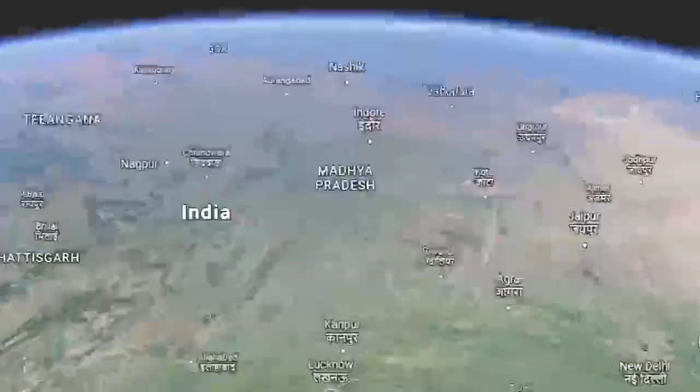Since 2010, Madhya Pradesh has embarked on an irrigation expansion and modernization plan. These efforts have been rewarded by record annual agricultural growth of 20% over the last 3 years. The state plans to further increase the total irrigated area to 59 lakh hectares by 2025.

This will be achieved by maximizing irrigation efficiency and water productivity by implementing pressurized distribution network in 80% of all irrigated areas.

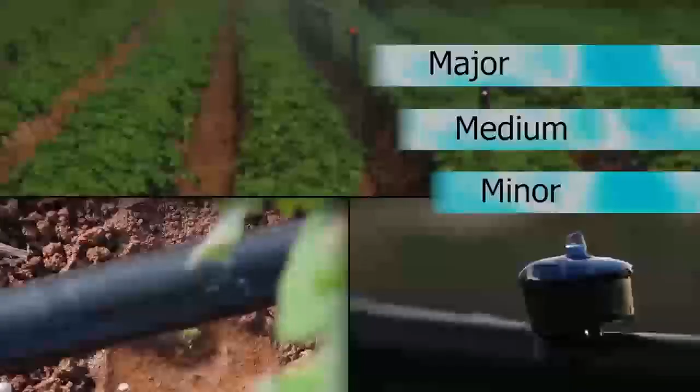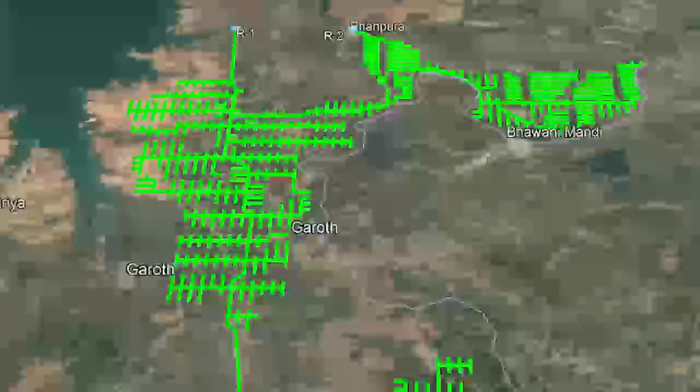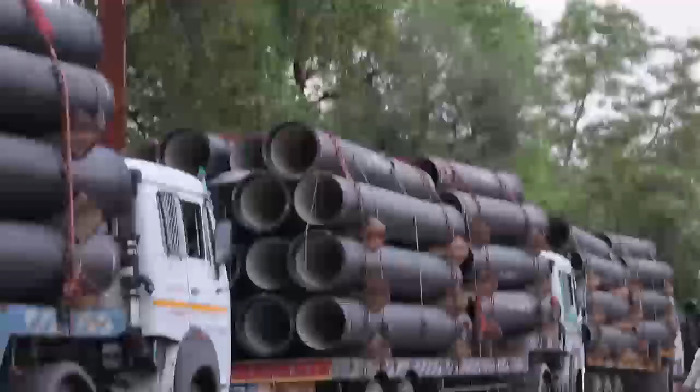The Madhya Pradesh Water Resources Department has awarded the Garoth project to Offshore Infrastructures Limited for execution. The project is located in Bhanpura Tehsil of Mandsaur district. This project is divided into two parts, Kanwali and Rewa Barrage.

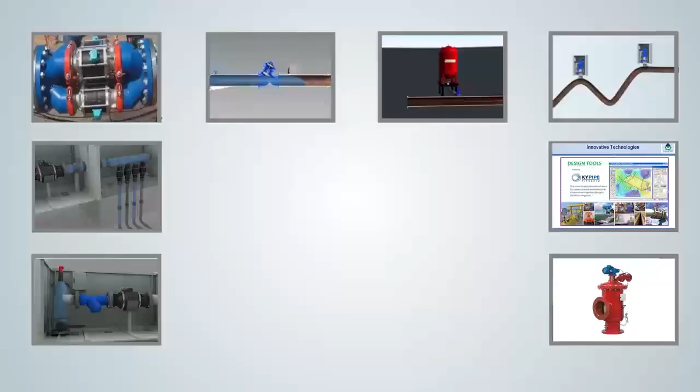Sai Sanket, a technology integrator and smart solution provider to water management projects, has been in the business since 1999. Sai Sanket is implementing smart water management solutions through innovative Israeli technologies.

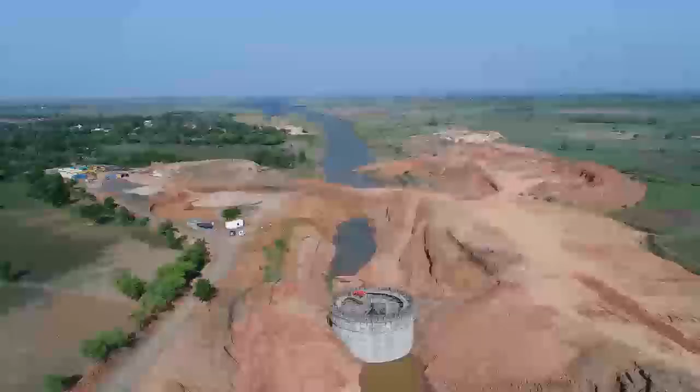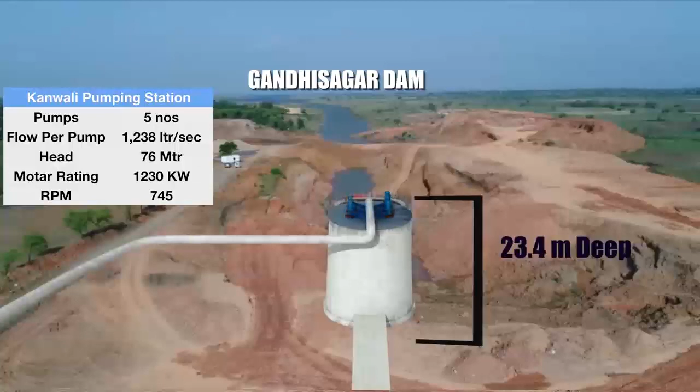The Kanwali Pumping Station. This pumping station is responsible for pumping water from the Gandhi Sagar Dam. The intake well is 19 meters in diameter and 23.4 meters deep. Using slip-form construction technology, the construction of the intake well was completed in a record time of just 1 month.

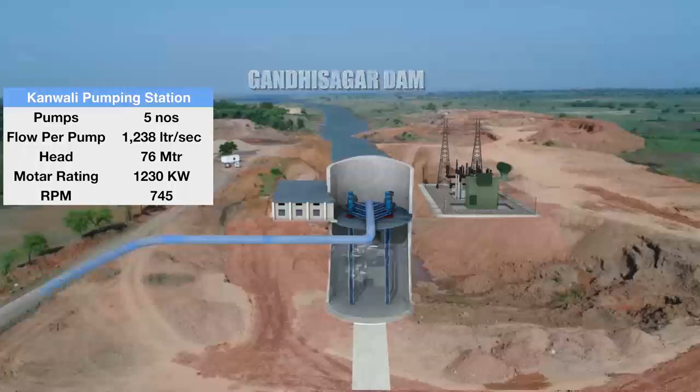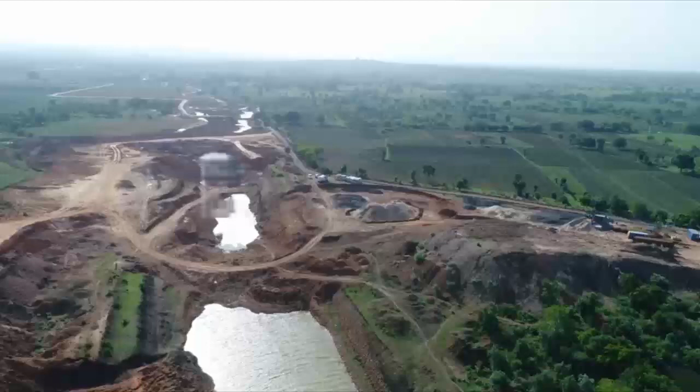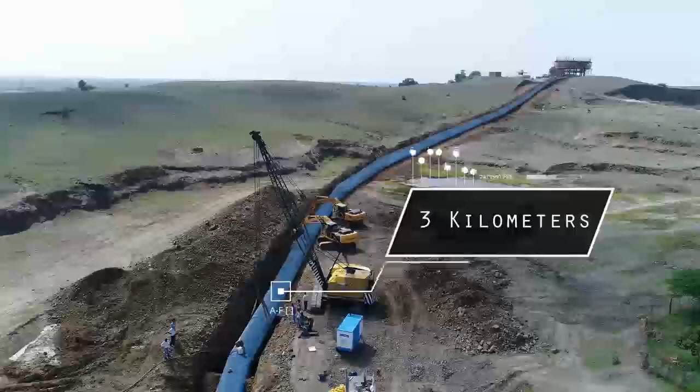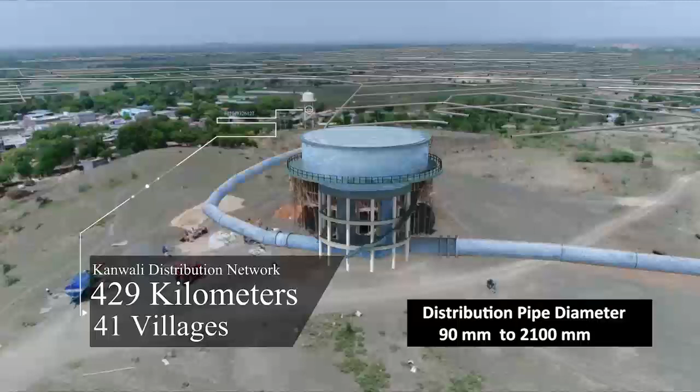There are 5 sets of vertical turbine pumps, each delivering 1,238 liters of water per second. This goes to a storage tank on a hilltop 3 kilometers away. The total pipeline length of 429 kilometers covers 41 villages within a command area of 15,000 hectares.

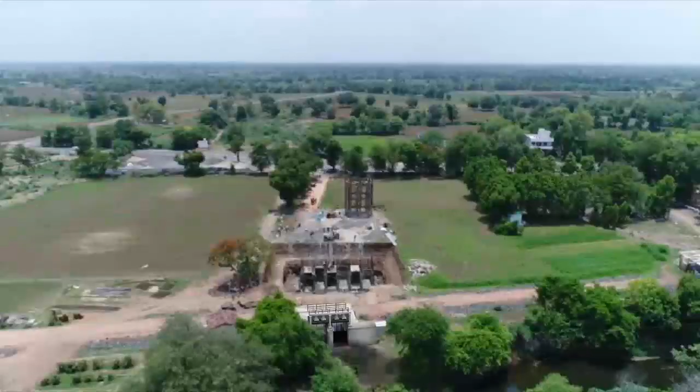The Rewa Barrage Pumping Station. This pumping station pumps water from the Rewa barrage. There are 5 sets of vertical turbine pumps, each delivering 527 liters of water per second to an overhead tank located in the vicinity.

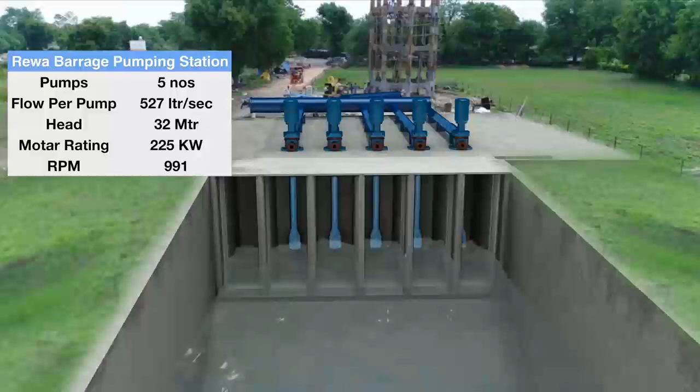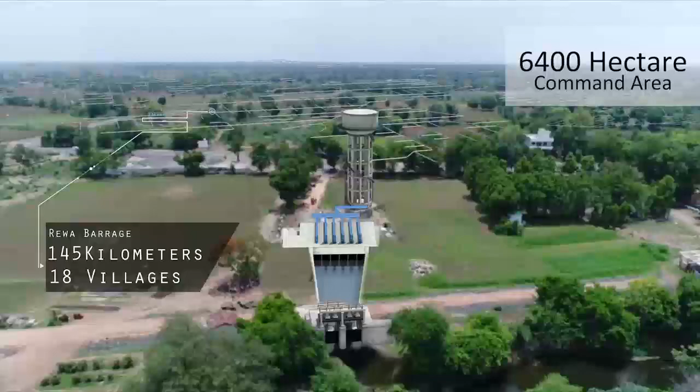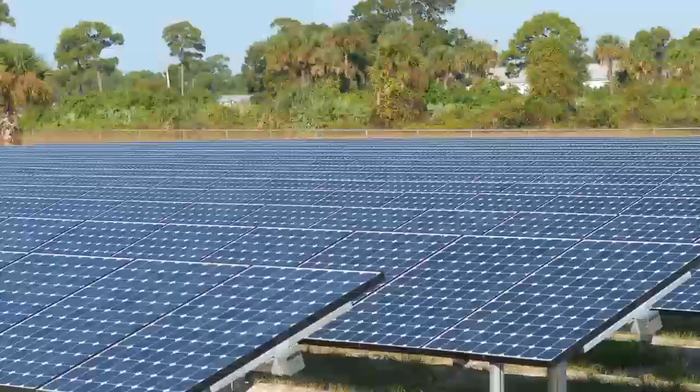The total pipeline length of 145 kilometers covers a command area of 6,400 hectares to deliver water through a pressurized distribution network. A solar power plant with a capacity of 7 megawatts is a part of this project, which will offset electricity consumed

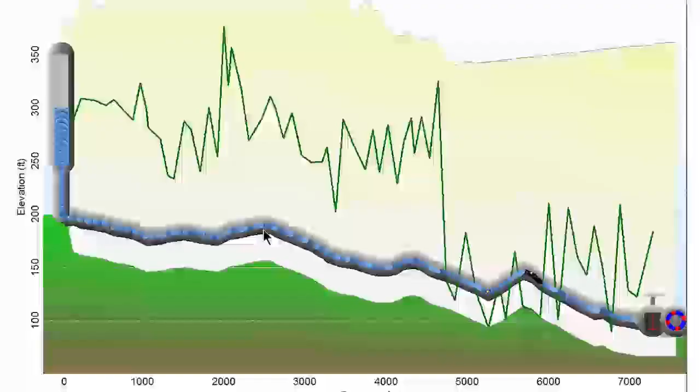by the pumping station. A team of experts did a detailed survey of the command area and further designed the water distribution network using state-of-the-art KYPIPE software, which will ensure equitable distribution of water to all the chaks at desired pressure.

Using Sai Sanket's smart solutions, the farmers will send a request to the control room with respect to the type of crop and the water required for the crop. Once it is approved, he will receive the required quantity of water for his farming needs.

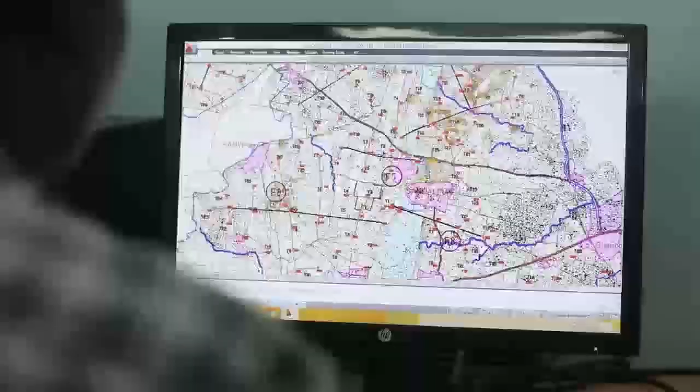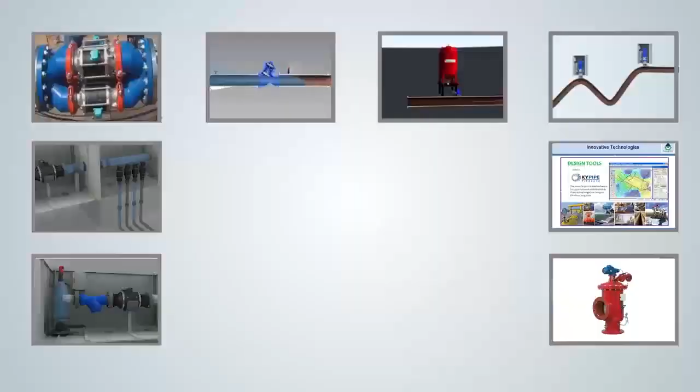The command area of 21,400 hectares is divided into chaks of 20 hectares, further subdivided into 5 hectares with water delivery outlets for 0.6 to 1.2 hectares. To ensure last mile delivery, the world's best water management system is being installed in the project, consisting of various innovative solutions such as

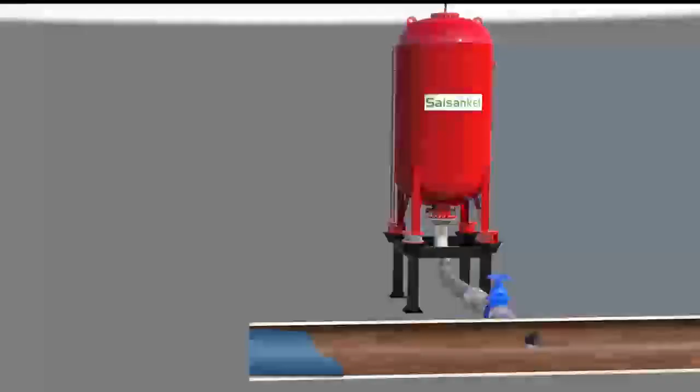bladder vessel based surge protection system. This provides an excellent maintenance-free compressed air based surge protection system for the pipeline. It protects the pipeline from extremely low and high pressure conditions, thereby preventing future leakages and likely pipe burst conditions.

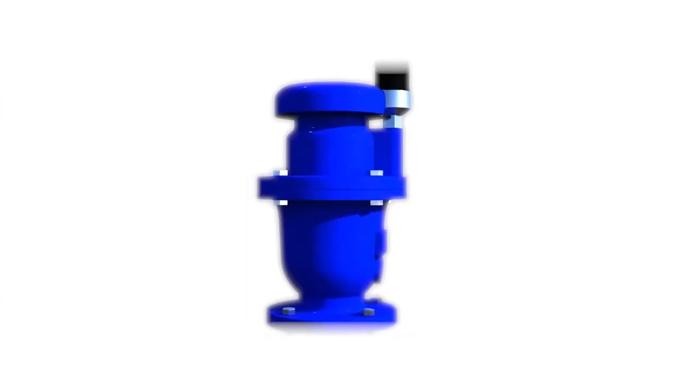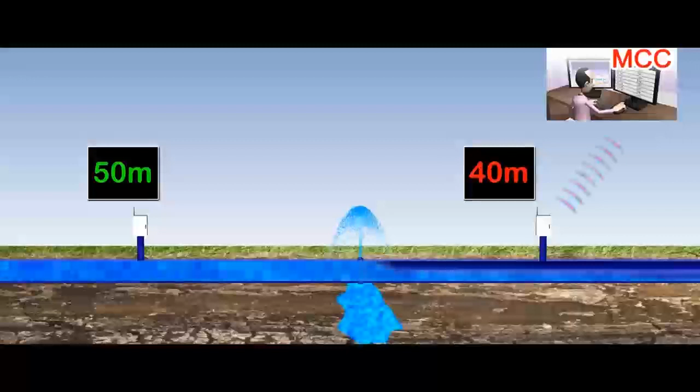Air management system. Preventing entrapment of air along the pipeline is the key to maintain high carrying capacity of the pipeline. These air valves are designed and developed by the world's best Israeli ARI system. The pressure management system is placed at regular intervals to identify the leakages in the pipeline. This system is equipped with Sai Sanket's smart solutions, which monitor the system 24/7 to take preventive measures for ensuring trouble-free operation.

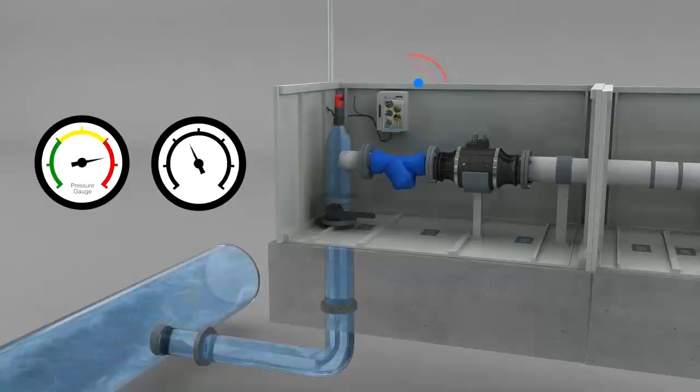Distribution Management System. The DMS controls as well as measures the flow of water to individual chak. The distribution management system is wirelessly connected through Sai Sanket's smart technology, which avoids draining of the pipe network.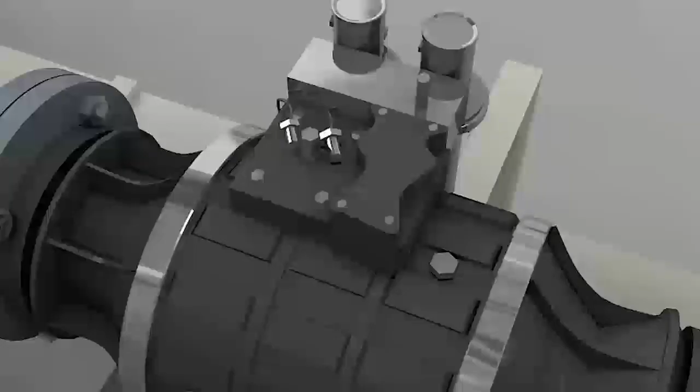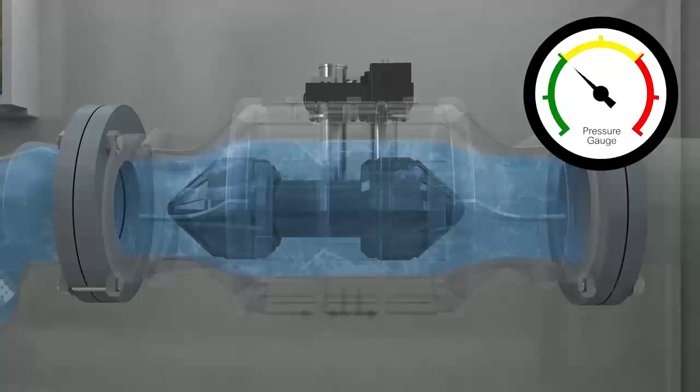Control valve, also known as C-valve. This allows rapid response to fluctuating hydraulic conditions, thus maintaining constant and stable pressure. The rapid opening and slow closing of the C-valve causes less turbulence and hence helps in reducing the surge in the system.

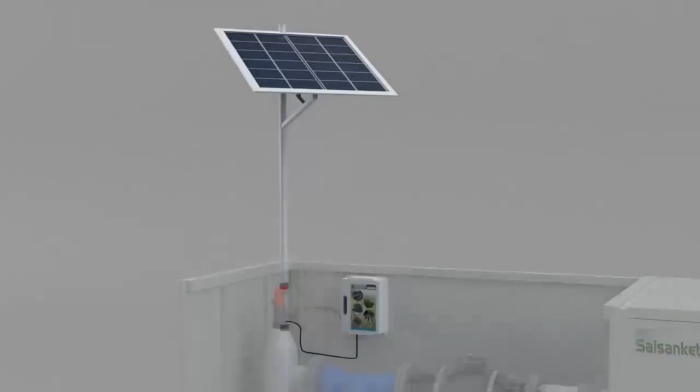Rotation Management System. The RMS ensures supply of water to alternate outlets at predefined intervals as per the cropping patterns and approved water usage. These systems are solar powered with battery backup, ensuring 24/7 working of the smart system to control flow rate and volume for a designated time period.

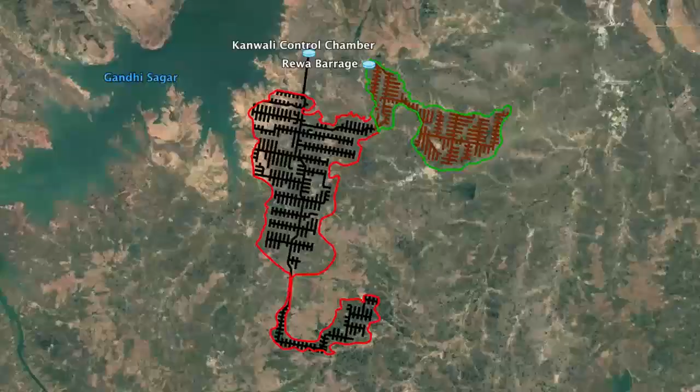Booster Pump Station. Booster pumping stations will be installed at various locations for online boosting of water to pockets of high elevation areas. The pumps installed in booster pumping stations will operate in tandem with the main pumping station using the hydraulic SCADA system with the help of wireless communication.

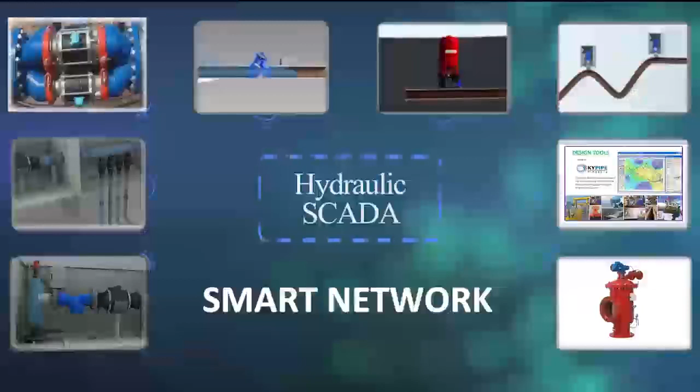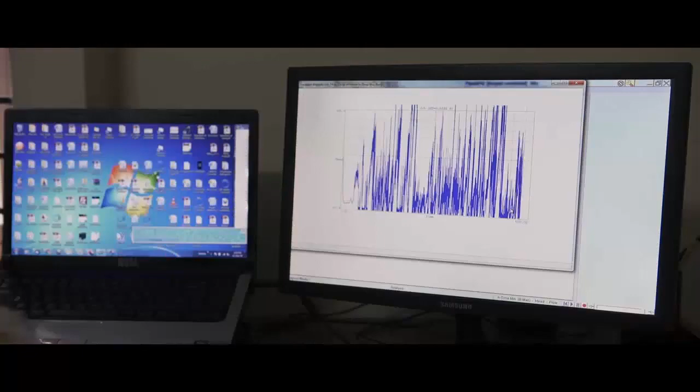Hydraulic SCADA system. All components of the pressurized distribution network are controlled through a hydraulic SCADA system, which provides live updates on registered mobile phones, besides giving access on demand to historical data. The complete system can be monitored and controlled remotely through cloud computing technology and wireless communication system.

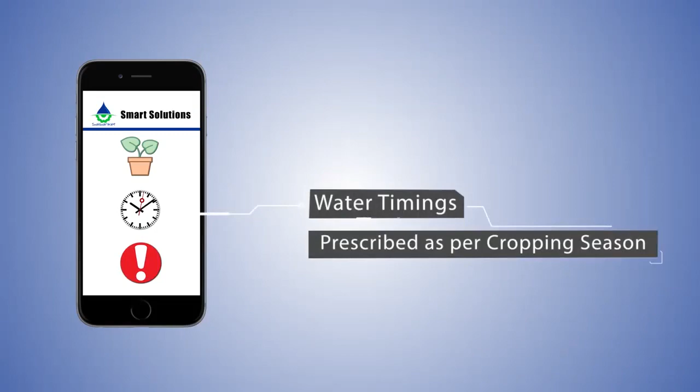This system allows for informed decisions in cases of vandalism, pipe leakage, and unattended deficiencies in the system in real time. The system sends SMS alerts and notifications. These will reduce the operational costs and improve delivery service. With these state-of-the-art innovative technologies and smart solutions, Sai Sanket ensures trouble-free operations and efficient delivery of water in the command area.

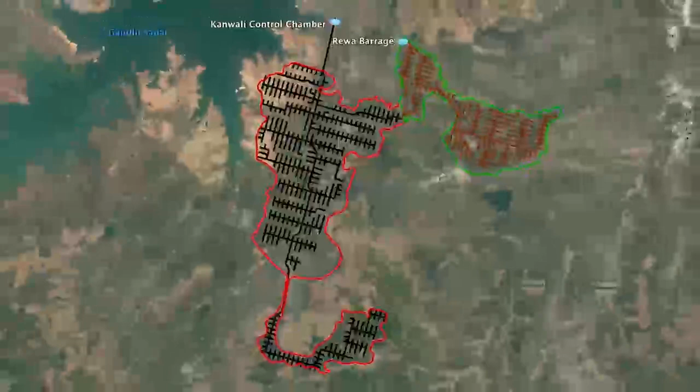Sai Sanket works closely for the socio-economic upliftment of farmers by forming a water user association, which gives information on the project and also creates awareness on efficient use of water for their crops and scientific techniques for agriculture.

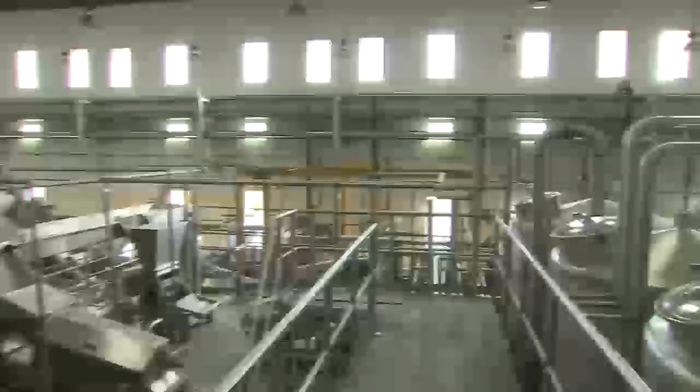Farmer Producers Organization is another initiative to bring farmers together and educate them about cropping patterns for different seasons. This cropping pattern is designed considering the soil and atmospheric conditions in a specific area. Farmer Producers Organization also helps the farmers to grow high-quality produce based on the market demand and also identify suitable buyers.

With increase in food produce, mega food parks can be set up in association with government agencies. This will help in establishing food processing factories and other ancillary industries to create a ready-made market locally for the farm produce. This creates an entire ecosystem in the local area, empowering the farmers and generating employment.

Sai Sanket is committed to bring a positive change by implementing world-class technologies and bring a socio-economic transformation in the Indian agriculture sector. Sai Sanket, the harbinger of Green Revolution.